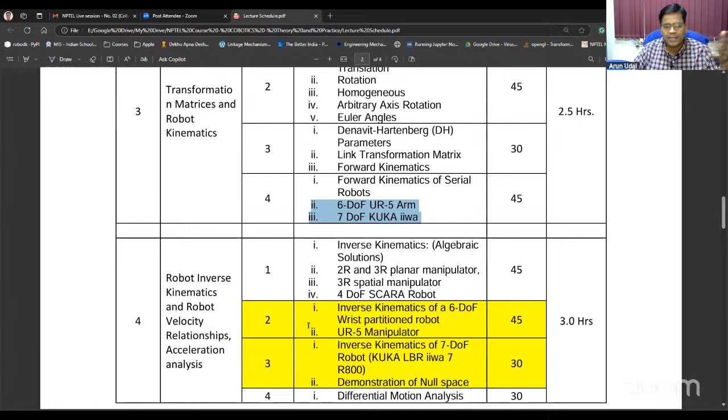So yes, actuators you have learned, various sensors you have learned in one of the modules. Transformation was very much the same, but I have also covered forward and inverse kinematics in the context of cobots only, that is the UR5 arm, one of the most popular robots or cobots, and the 7DOF KUKA iiwa arm, one of the most advanced cobots in the market today. For those two robots, I have covered both forward and inverse, so you can use it directly as is. I have discussed it in my syllabus and in my lectures.

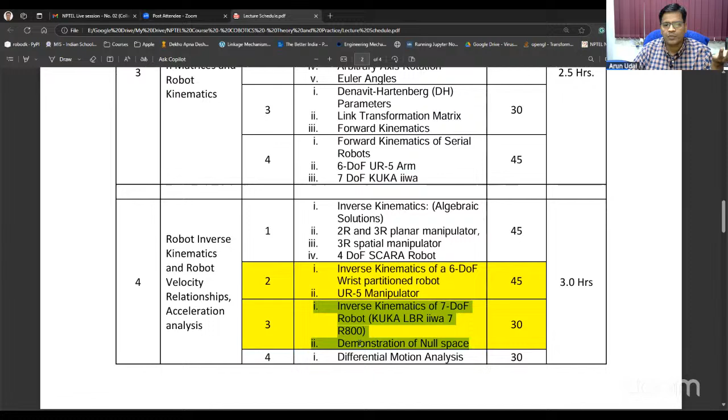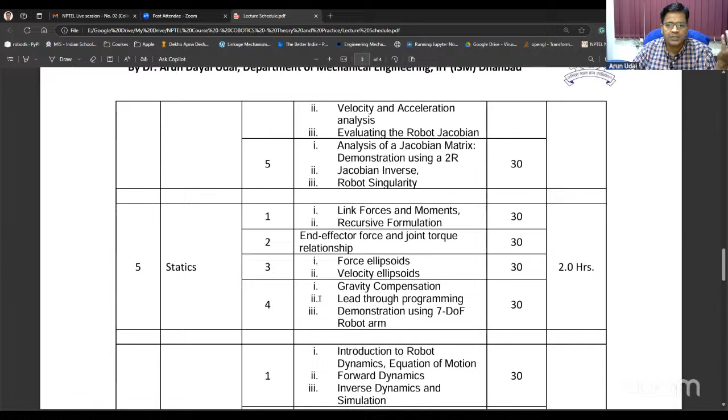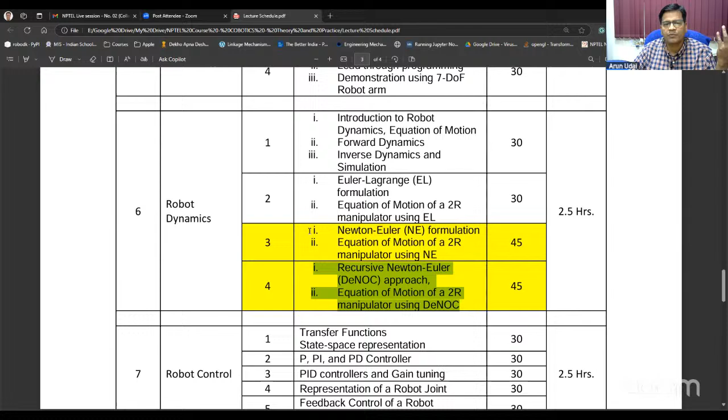Very importantly, I have also discussed 7DOF workspaces, that is, a demonstration of null space I have shown. In the later module, I have covered gravity compensation and all. That was in my last video interaction; I discussed a few of these. This was one of the leftover portions not covered in my modules due to the time limitation of this course, but it will definitely be covered. Recursive Newton-Euler formulation I have used to do dynamics also. This is an age-old thing, nothing new, and it still applies to the robot and the cobot.

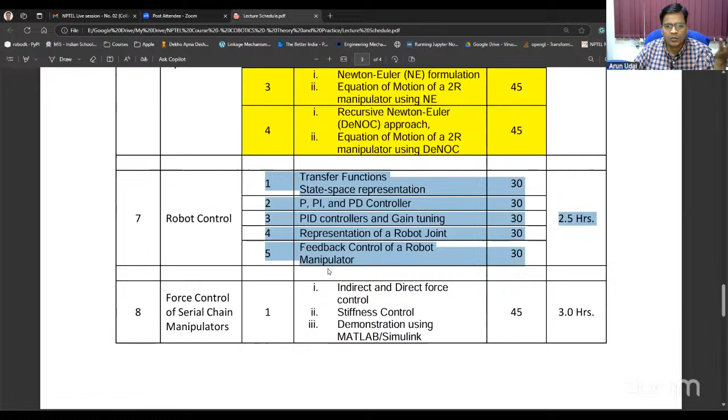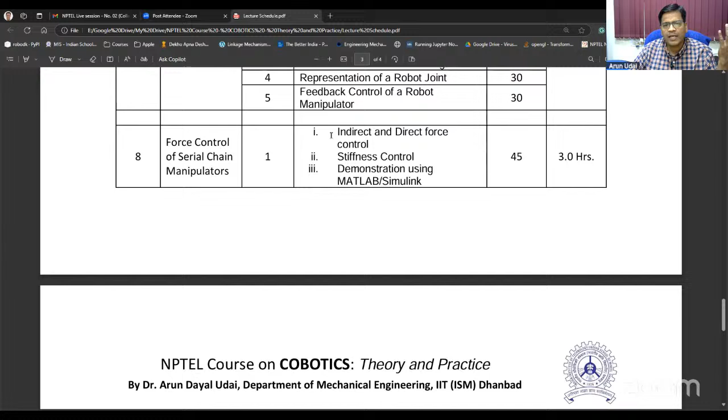So that was covered. Starting from here, after my earlier video interaction, something new that I have covered is force control of serial manipulators. This is very new to you because it is not covered in quite a lot of textbooks either. So indirect and direct force control, stiffness control, and I have given a lot of MATLAB examples.

So you have access to MATLAB along with the course, and all the required modules are with you. So I would suggest you just go through these lectures. You can just one-to-one follow the lecture instructions, and you can do one such of your own, and it is made downloadable through your course access. So as resources, you can download almost all the models that I have discussed in the class.

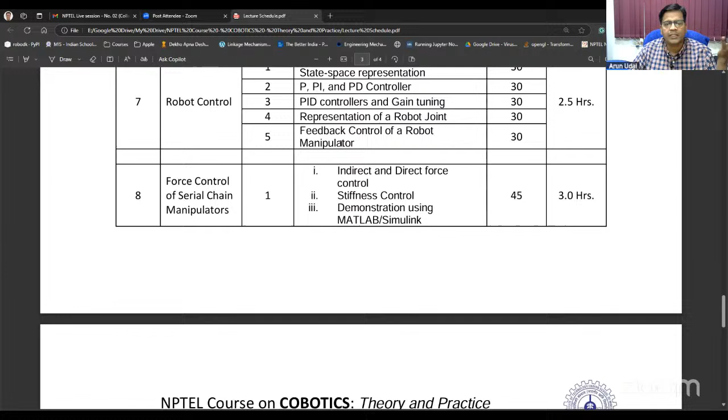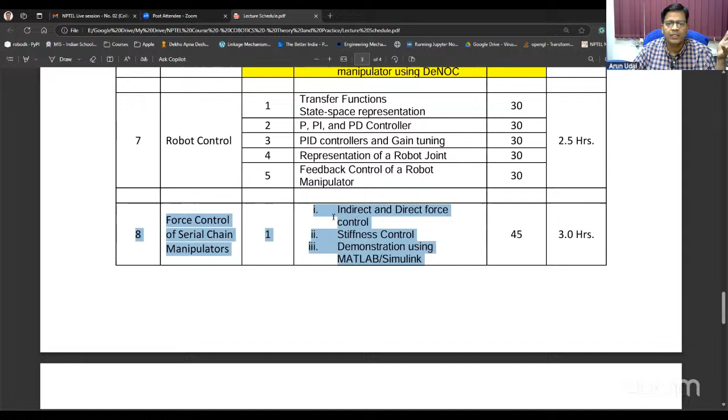So this is one of the crux of this course, that I would say is the takeaway of this course, that actually implements the algorithms which actually convert a robot to a cobot. So stiffness control is there, hybrid control, admittance. So all these are covered. Special features I have discussed, I have demonstrated using the KUKA iiwa robot. Those real example videos I have shown, some special features I have included.

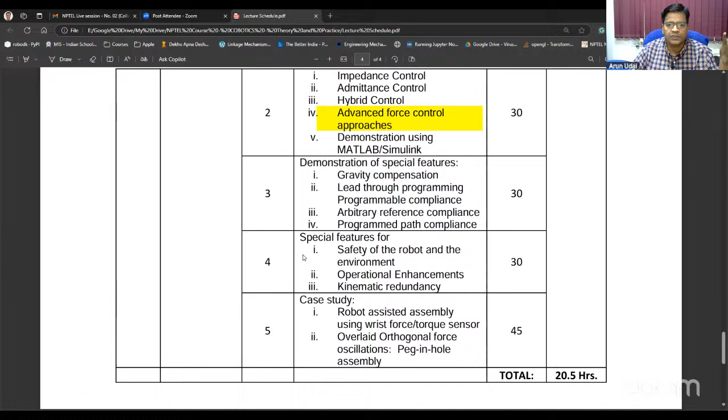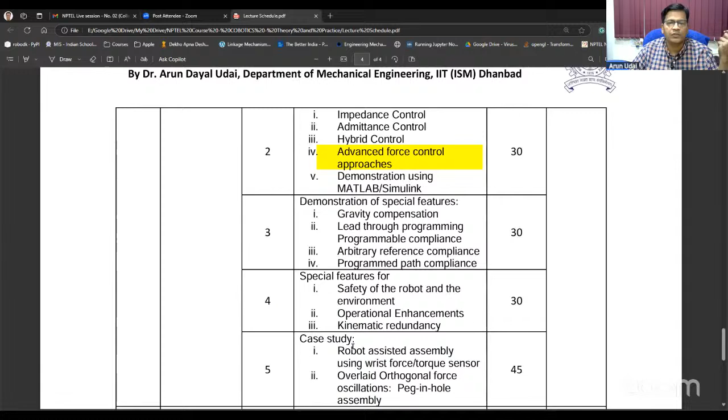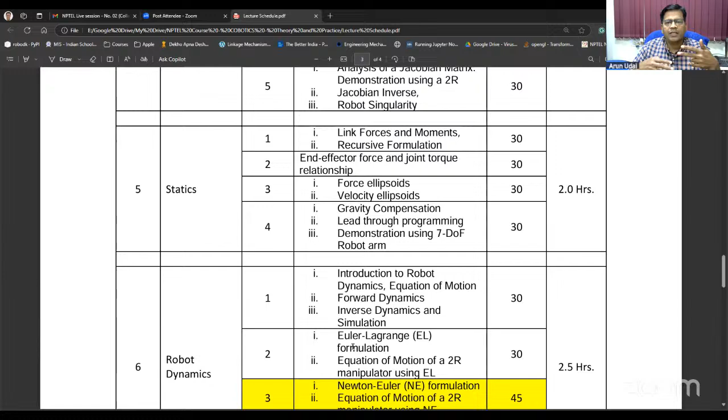One very good case study I have shown, that is for the assembly operation, which is not possible using standard position controlled robots. So yes, this last module is essentially the takeaway for the cobot course, and the rest everything I have tried to manage with kinematics and inverse kinematics discussed in context to cobots. So that is what I have done. ISO standard. So this essentially makes you ready to take up any cobot in your workspace.

For UG learners, this is altogether a new thing. I also have a new course which is coming in the next semester, the next 6 months. So that is Industrial Robotics: Theories for Implementation. I wish quite a lot of you to rejoin that course as well. That is more fundamental in nature. That is there already. That has been running for the last 2 years. This will be the third year that it will be floating.

So I would suggest you can go for that also, apart from this course. But yes, quite a lot of fundamental stuff will remain here as well as there. So that course may become a little easier for you now if you have done this course. So yes, this course I'll conclude here. If you have any queries, you can definitely discuss now.

For undergraduates, I hope this course has ignited the passion of exploring cobotics further, and maybe you can consider this as an opportunity, as a career option for you. And for postgraduate researchers, this is very good knowledge which you can use in your research as well. For industry professionals, this gives you quite a lot of insights where you understand how a cobot works, and accordingly you program your cobot, and you know the limitations now, the limitations and the ISO standards which govern such robots.